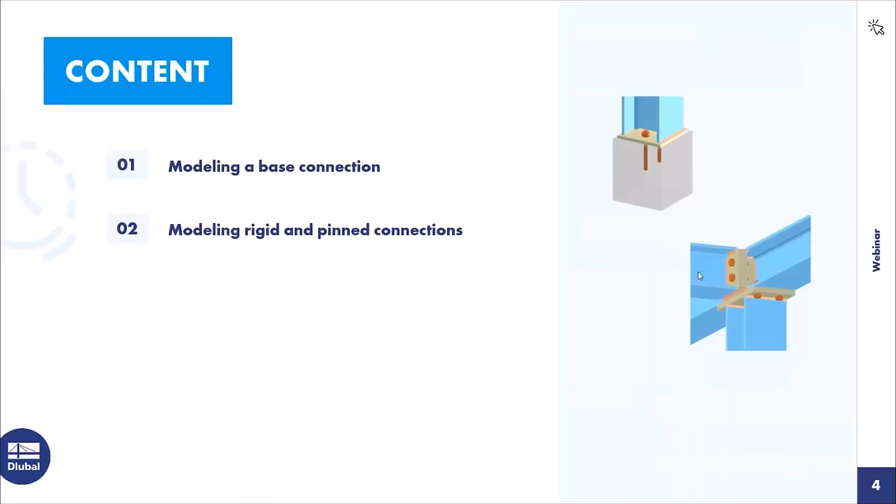For today's agenda, I will model different connections. I start with a base connection, then rigid and pinned connections. Then follows the connection design, and we do a stiffness analysis. The next point is result evaluation and documentation, and the final point is prospect.

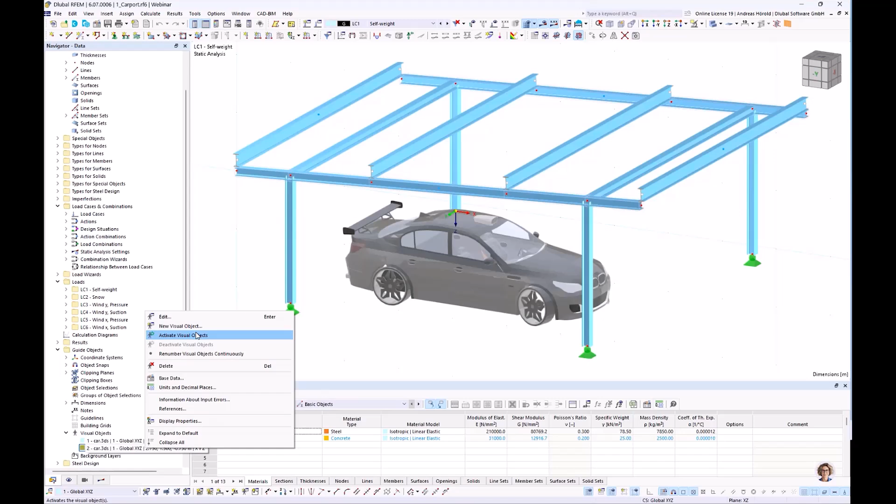Okay, that's the model for today: a larger carport with dimensions 6 meters by 7.5 meters. I display two guide objects - visual objects - and activate them: two cars so you can estimate the dimensions of the carport. That's the reason it's made of steel; it's a little bit larger than a normal carport.

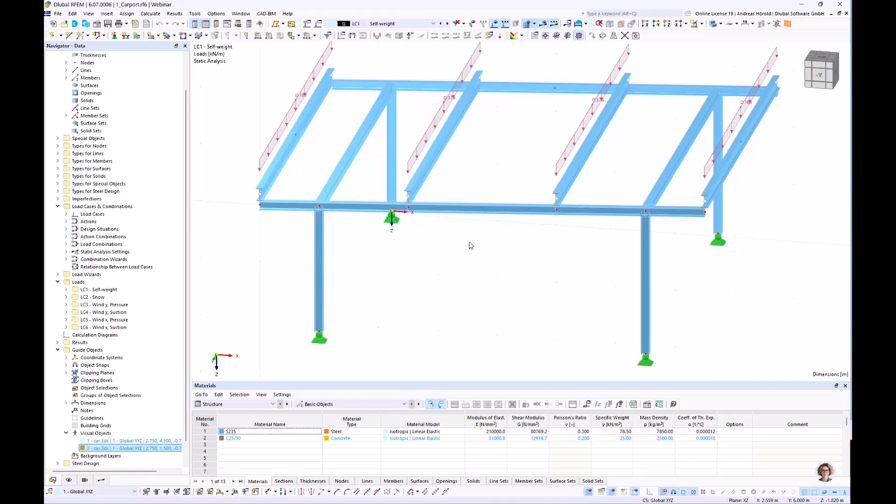Okay, I deactivate the guide objects. So we have different load cases: self-weight load case, snow, wind in all directions. Then there are different load combinations, for the ultimate limit state and for the serviceability limit state design. Also load combinations for the design of lifting up.

So then I did a steel design. Design ratios by members - all designs are fulfilled, with larger and higher design ratios in some members.

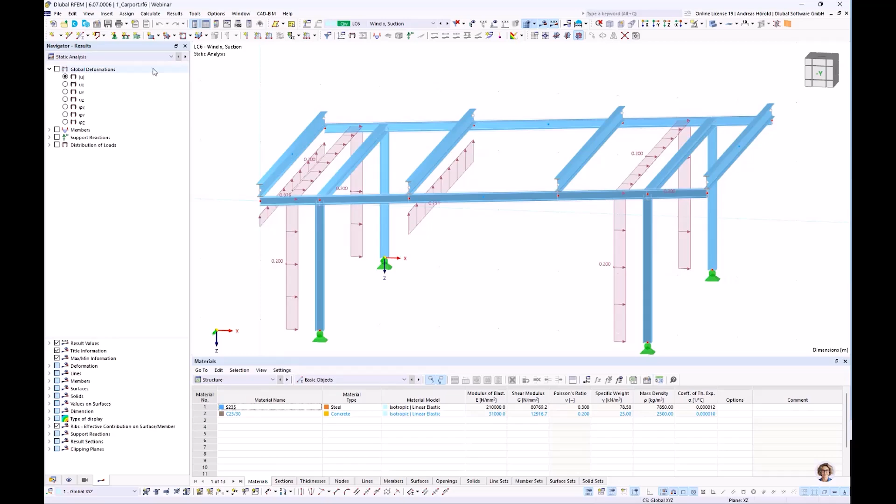Then we activate the steel joints add-on in the base data add-ons. Steel design is already activated, and we activate steel joints so we can design all the joints of the structure. For standards, we use the Eurocode and the German National Annex for all the load cases, classification, and combination wizards for the steel design, and also for steel joints.

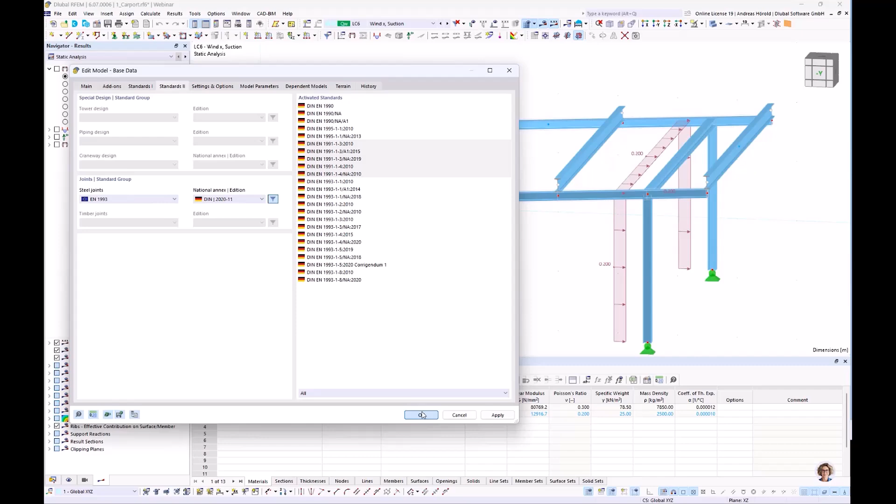So then we start with the first joint. I right click on that node and choose create steel joints. It's only one member, so the type is 'ended' - that's clear. Maybe we turn back to main. Let's check the ultimate configuration - that's default.

You can perform a buckling analysis - if you have larger plates, such as webs or so, you can perform a buckling analysis. That's quite important. The design check for the plates: the limit plastic strain is 5%, also for the welds. You can change that, but I'll leave it because that's the value from the Eurocode standard. I'll leave all the other settings as well.

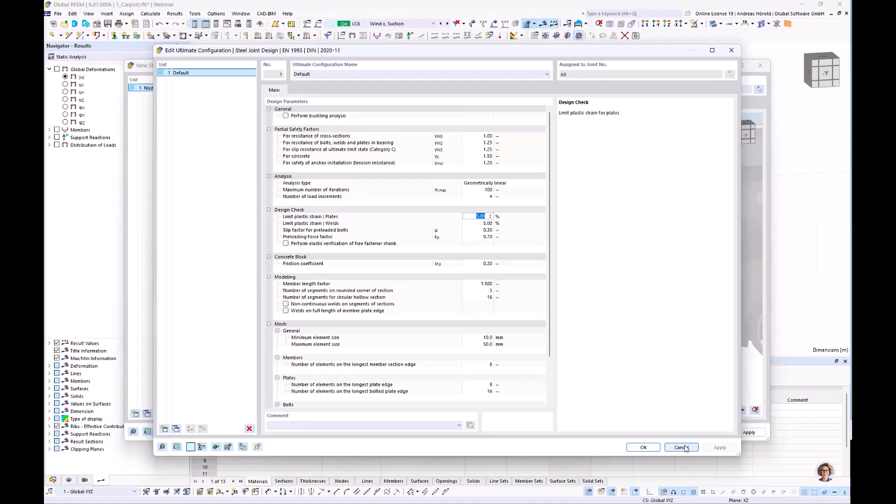Then we turn to components, and I can press insert component at beginning or at end - that doesn't matter. I select this component: base plate. Now we have different modifications, stiffening elements, connection elements, and others, including fasteners. You can move the mouse over the image and see as a tooltip what connection or stiffening element is available. So I select base plate.

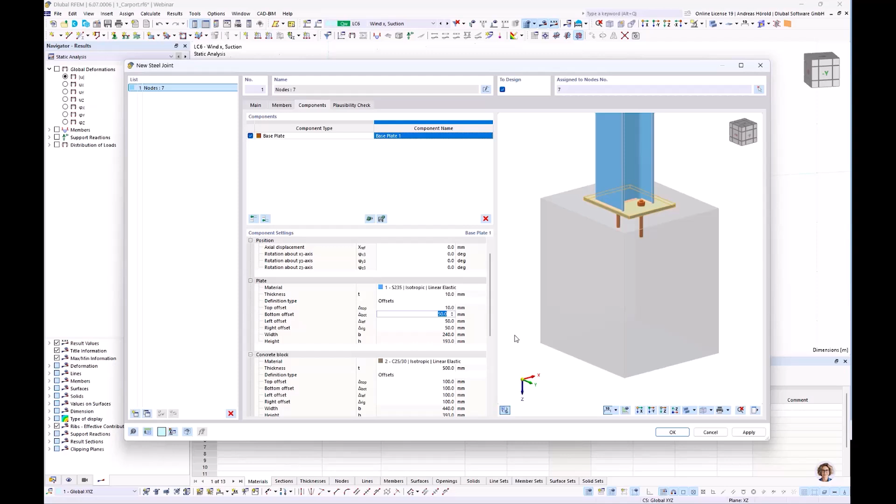That looks already quite good. That's a concrete block; we decrease it a little bit. Let me enter some values: the thickness of the plate should be 10 millimeters, top offset in all directions is 10 millimeters. To overtake the previous value, you can press F8 - F8, F8, F8 - then we have the value on all sides.

So then the thickness of the concrete block should be 200 millimeters, and I define the offset again - also a very small offset of 10 millimeters. I overtake it again with F8.

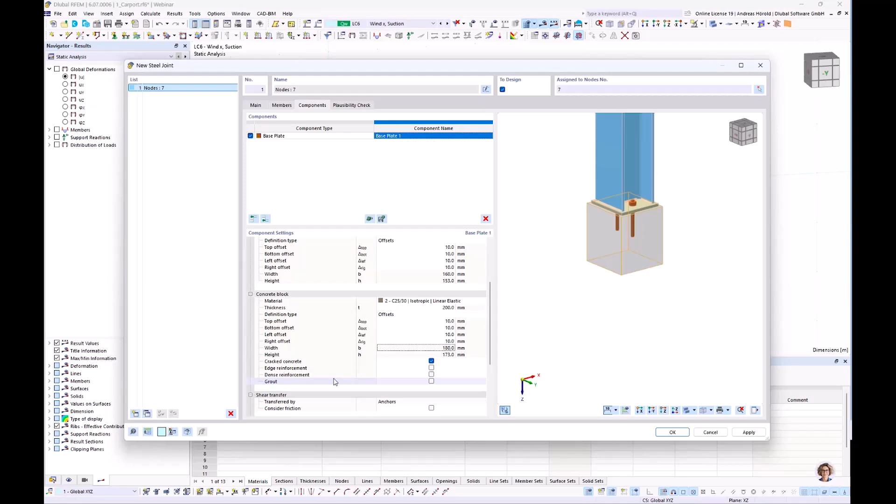So then you can consider cracked concrete - yes, we do that. You can also consider edge reinforcement, dense reinforcement, grout - you can display that grout, but no, we don't use a grout. Then you can consider the shear transfer by anchors, and you can also consider friction if you want.

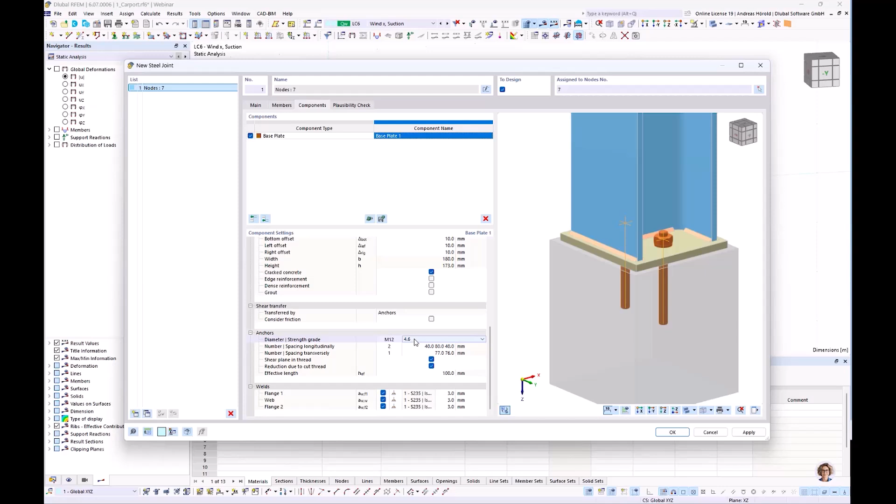So then we turn to the anchors. M12 is okay in our case, and we choose 4.6 for the strength grade. So these dimensions are okay, these distances. Then we change that value so it's exactly in the middle. The shear plane shouldn't be in the thread, and we consider the reduction due to cut thread.

So the height or length of the anchors should be 100 millimeters - that's okay, and the welds are also okay. Yeah, that was very quick - that's all for this joint. We do the plausibility check - that's okay. We take a look at the model, and now you can see the joint, the column base joint, here.

You can disable it when there's no joint model, or you can display the simplified joint model right above here. But we would like to display the detailed joint model.

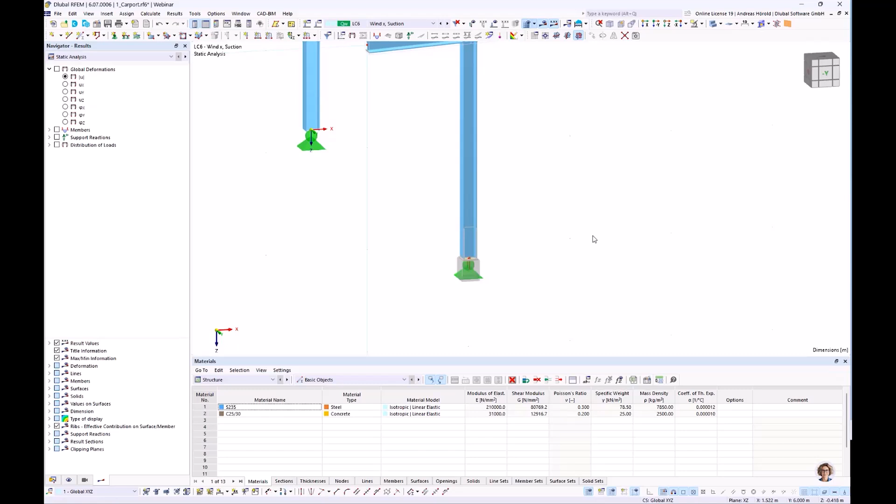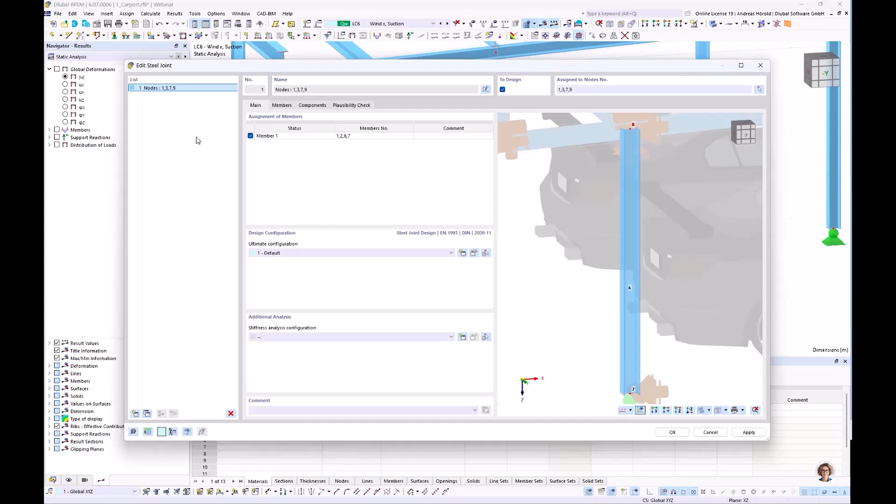So I double click on the steel joint again, and I assign also the other nodes right above: this one, this one, and this one. Okay, now all 4 nodes are selected.

So the next joint is the frame corner. We can see in the model, the steel model is stiffened in all directions by frame corners, in this direction and also in this direction. There are no bracings.

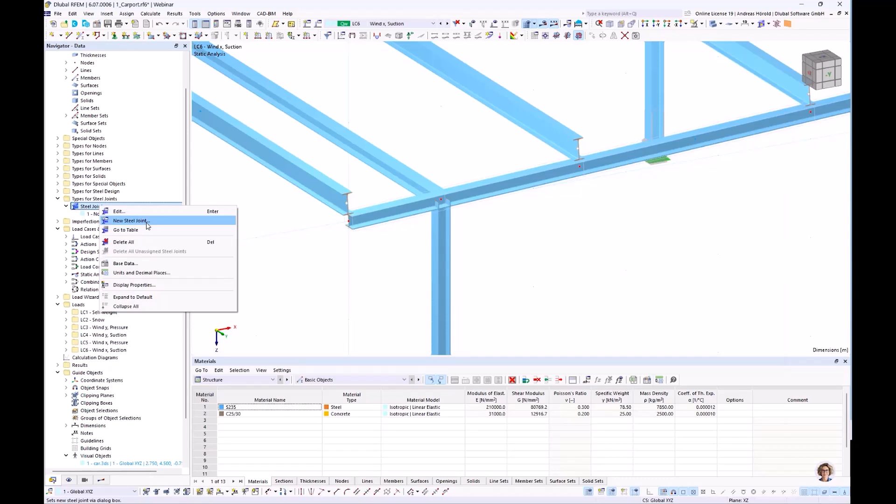And we would like to define the connections on the frame corner, so let me show you another way to do that. You can see in the navigator data the types for steel joints. One steel joint is already there, and I can do a right click and press new steel joint. But now I have to assign the node.

So for members, those 4 members are connected at that node, and we would like to do a stiffness analysis for the frame corner. That's why I select initial stiffness, no interaction.

Let me go to the settings. Initial stiffness is selected. For the future, there will be another stiffness analysis type available, the stiffness diagram. That's for larger connections with high loadings, where you can consider the plastic behavior.

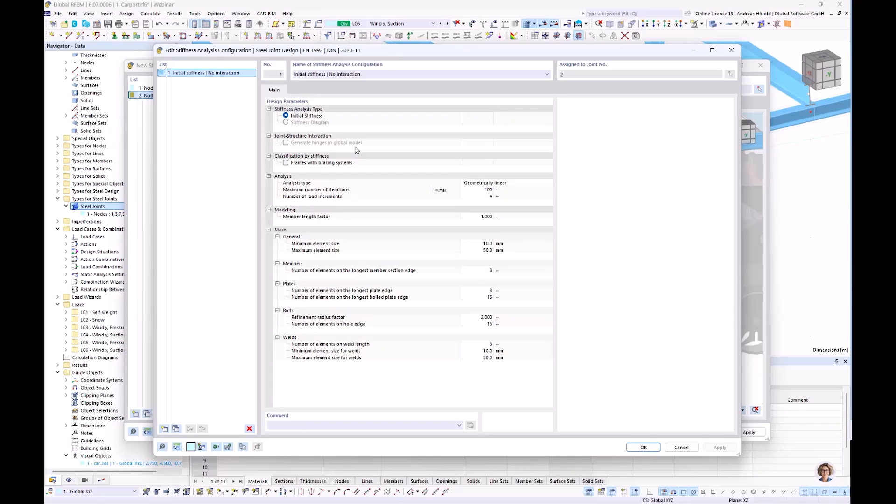Then in the future you can select generate hinges in the global model. That's not yet available, that's why we do that by hand later. Okay, that's all.

So we turn to members. At least one member should be supported. That's ended. This one is continuous, and automatically member 3 is also set to continuous. So for the column, we would like to do a stiffness analysis.

The program should calculate the stiffness of the joint around Y and around Z, meaning M-Y and M-Z. And for this horizontal beam, there should also be a stiffness analysis for M-Y.

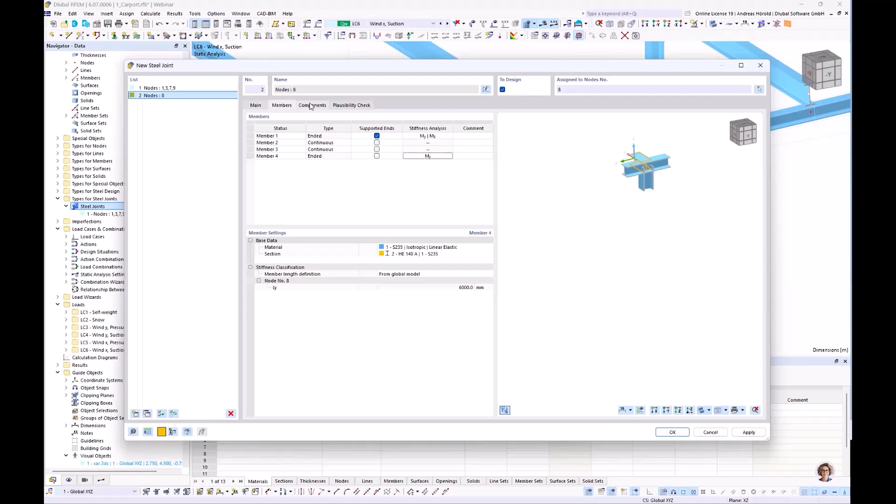So then we turn to components. We insert a component, and this time an end plate. You can move over it, with the end plate in the middle. So the connected member 1 should be the column.

You can see it's selected in the right window with the yellow selection. And the reference member should be member 2 and member 3. Okay, so you can already see a connection forming.

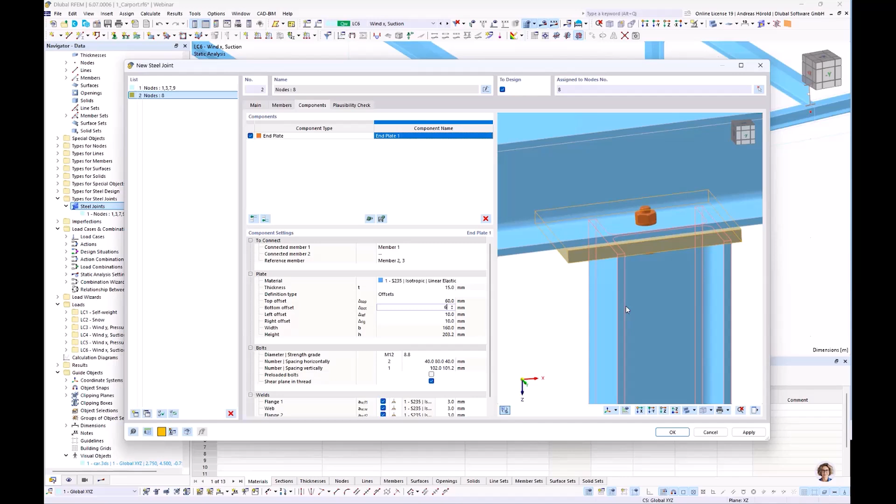Now we have to modify it with the next steps. So the thickness of the plate should be 15 millimeters, the offset in this direction should be 60 millimeters, also in the other direction, and in this direction there should be no offset.

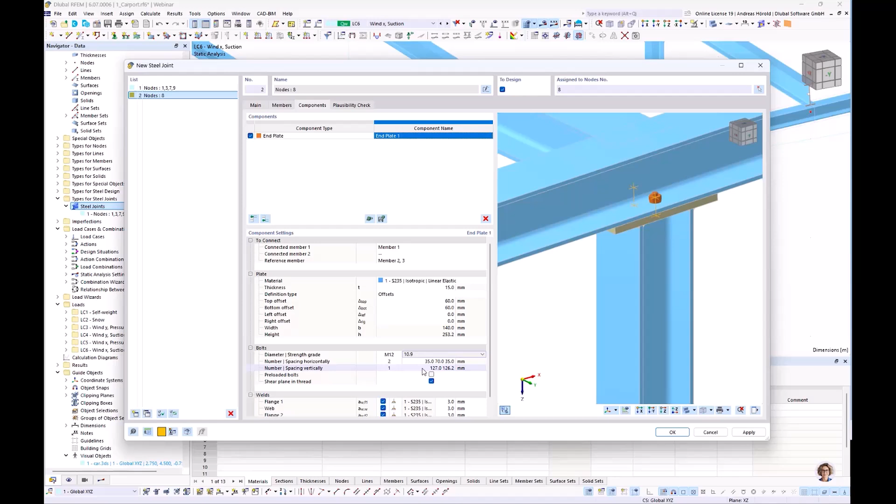Now you can see the changes in the window any time. So M12 is okay, but we choose 10.9 as strength grade. That's okay, all those distances, but we also select for the spacing vertically 2.

And I select these values, and that looks quite good. We use preloaded bolts for this connection, and the shear plane shouldn't be in thread. And I change the welds for the flanges to 4.

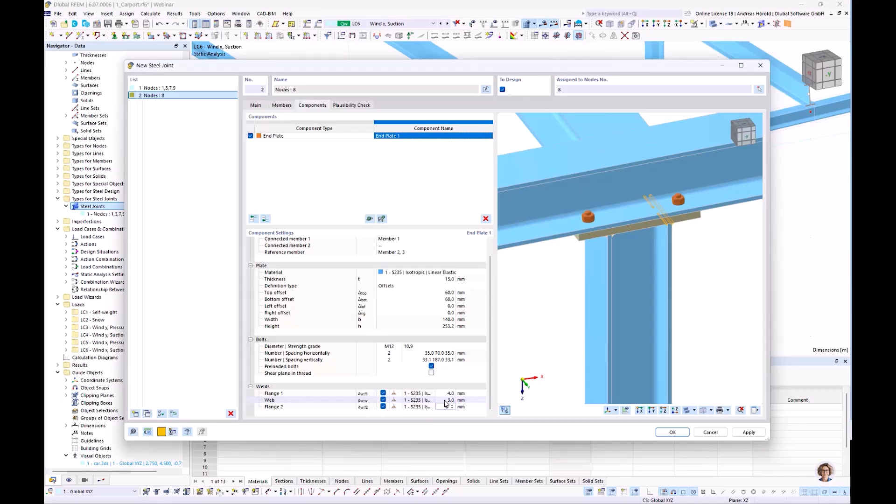Okay, now you can see any time what parameter should be defined. So that's all for the connection of the column to the horizontal beam.

And now we would like to connect this horizontal beam with this horizontal beam. That's why we insert a component from the library. So I select that, and what's quite new, the library is in the Dlubal Center.

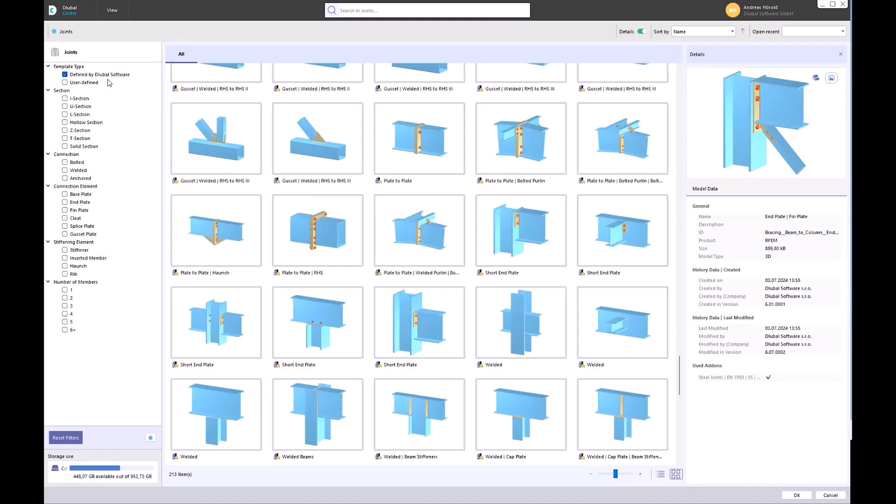Now you can see different template types, also user-defined ones from me. So I select only the defined connections or joints by Dlubal Software. We've got the I section, the connection is bolted, and there are 3 members in the connection.

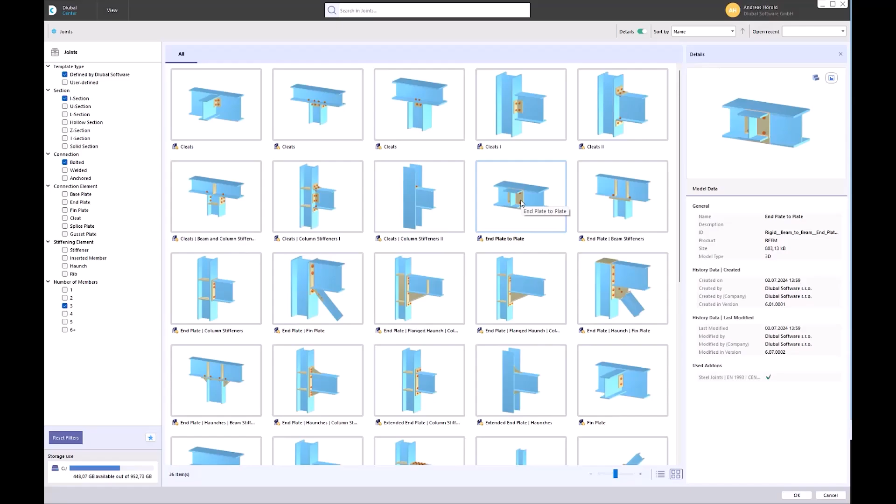So we would like to select end plate to plate. That looks quite good, so I double click on it, and we should see a preview in some seconds.

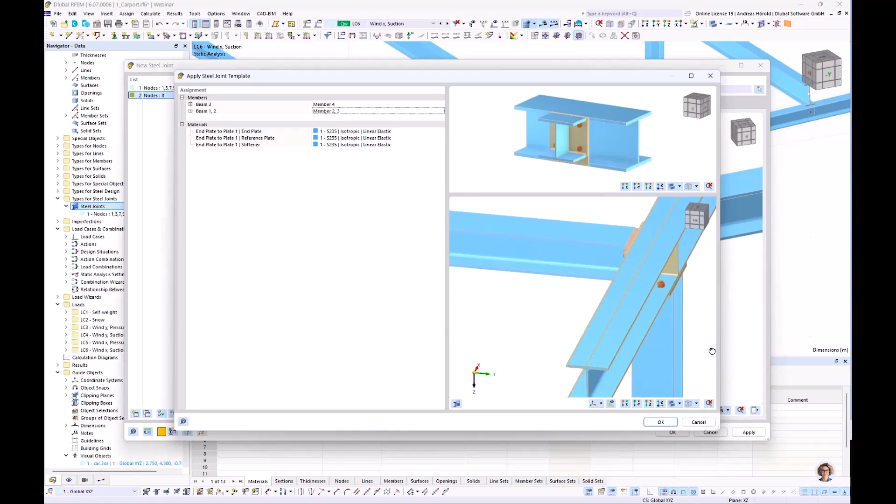But at first we have to select the member that should be connected, member number 4, this horizontal beam, to member 2 or to members 2 and 3. The preview looks quite good, and we can accept it with OK.

So let me change the values, also a thickness of 15 millimeters. No, we have to select that line first. Thickness of 15 millimeters, okay.

Minus 7.5 is okay, that we can consider a weld here. Okay, all the values for the end plate 1 is okay, but we have to modify the reference plate, 15 millimeters. The top offset and bottom offset is okay.

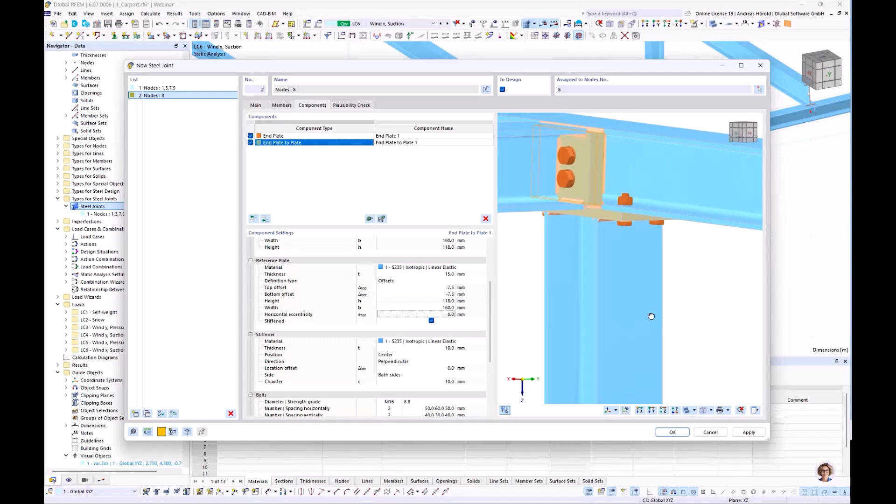But I decrease the width so that we have the same dimension as the end plate, so it should be stiffened. Okay, but not on this side, because we would like to define two stiffeners here in the back, but we can't do that because the connection would be closed. So center is okay, but not both sides, only one side.

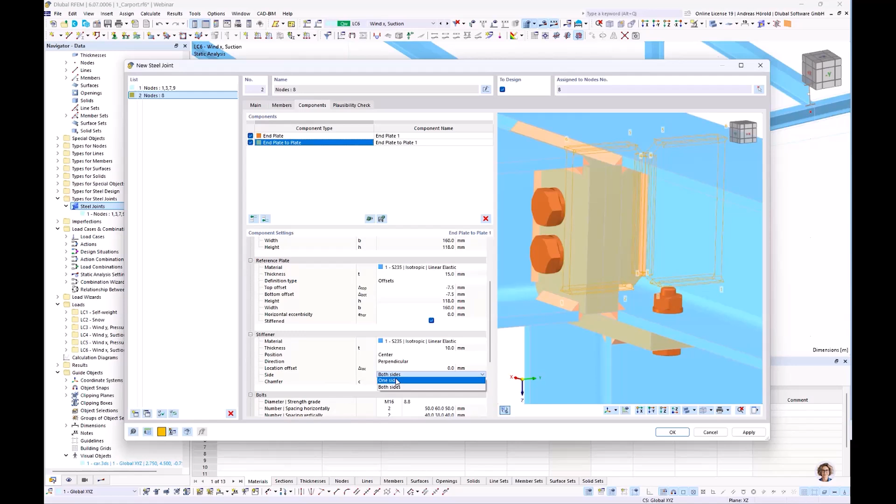So now this stiffener has disappeared. Okay, then the diameter should be M12, 10.9 as strength grade.

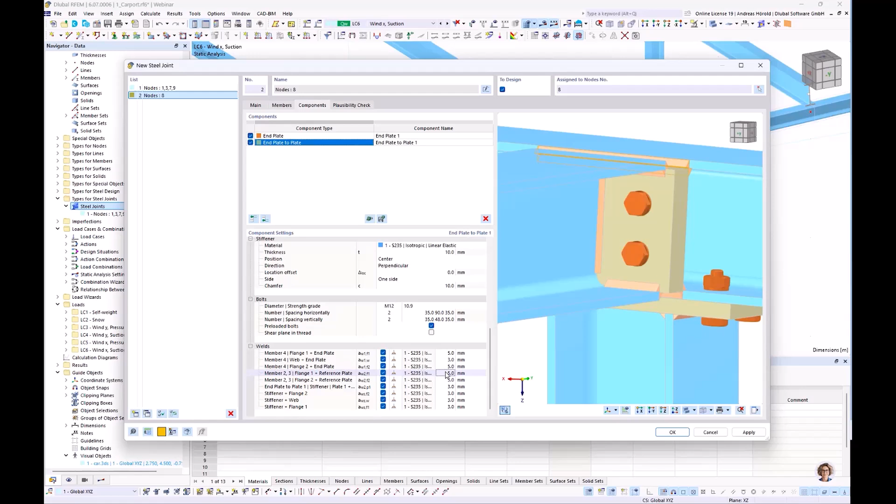So let me change the spacings: 35, 35, and then also here 35. Okay, so preloaded bolts, and the shear plane shouldn't be in thread. The welds are okay, 5 mm for the flanges and 3 mm for the webs.

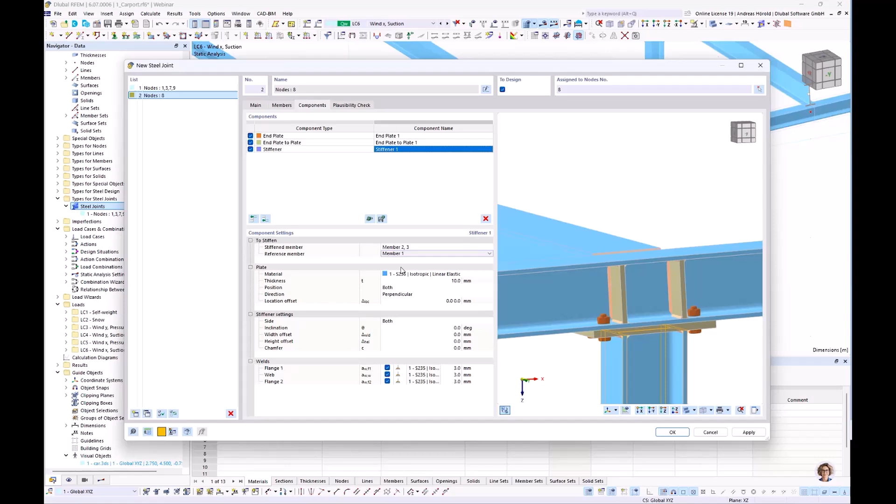Okay, so then we have to add the stiffeners here. I insert a component at the end, you can see the stiffener here. The stiffened member should be this one, the horizontal beam, and the reference member should be the column. So then the position is okay.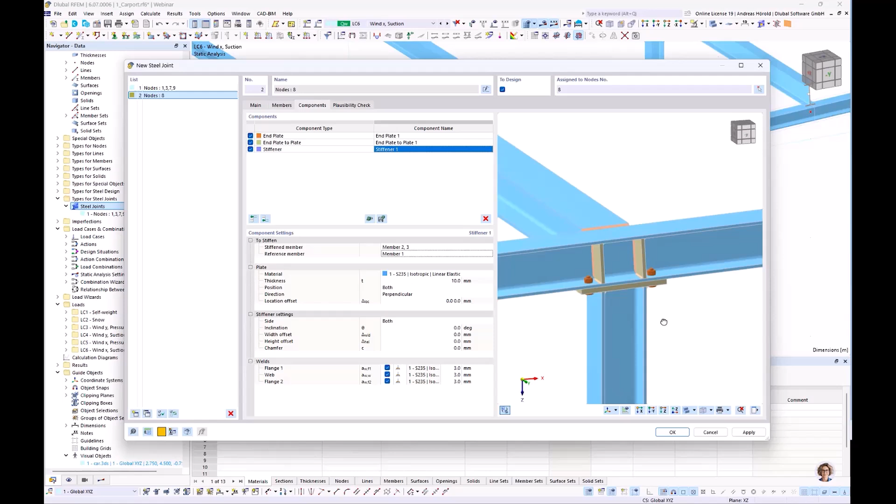You can say perpendicular or parallel. Sorry, that was a wrong click. So that looks quite good.

But it shouldn't be on both sides. You can see that would be closed here. That's why we select the right side, then we have only the stiffeners on this side.

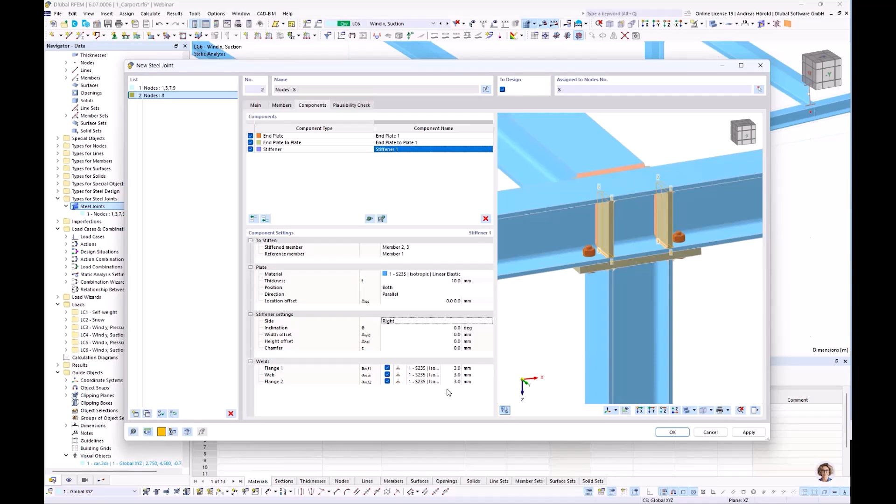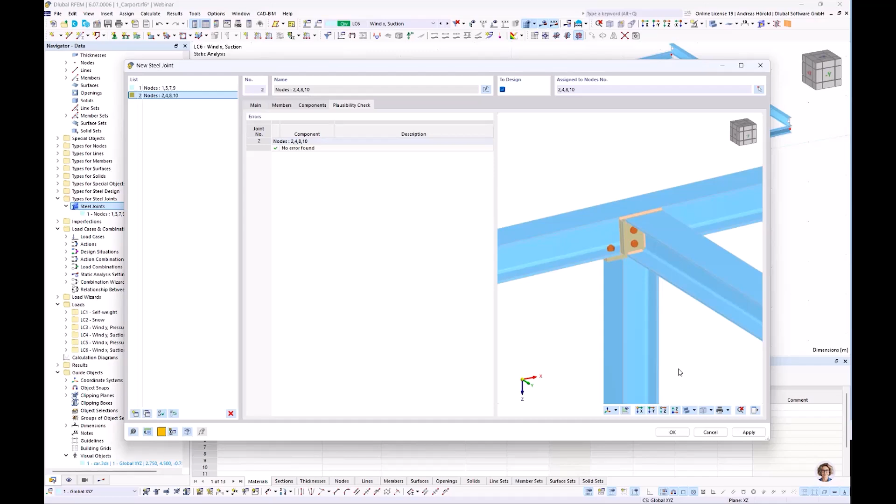So the welds for the stiffeners are okay, 3 mm. Plausibility check is okay. I can select also the other frame corners. Plausibility check is okay, and we can display all in the model. Okay, that looks quite good.

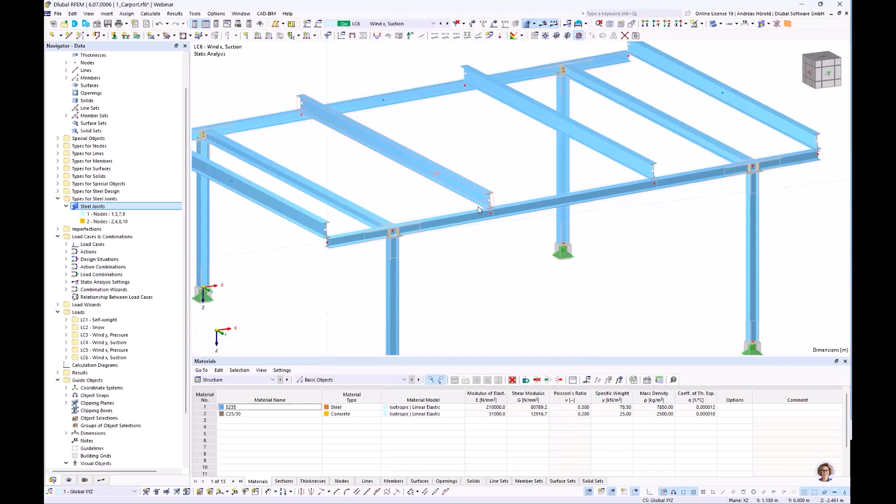Then we add joints for the purlins. I do a right click, create steel joint. So then members are, those are the 3 members.

This one is supported and also continuous, and member 3 is also continuous. So then component.

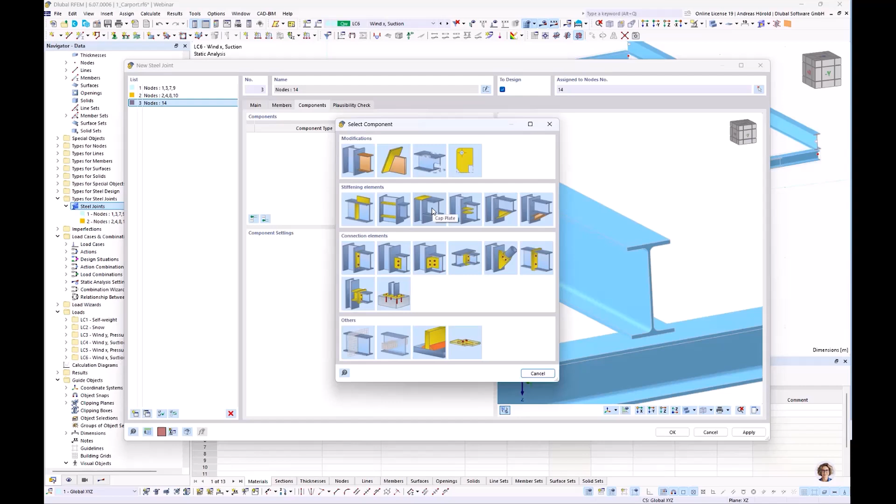At first we enter a cap plate at the end, not that we create a gable support. So yeah, beginning or end, that doesn't matter. And you can see the cap plate and the second line in the middle. So stiffened member is member 2, that's okay.

10 millimeters is also okay, but I define a top and bottom offset of -5 millimeters, so that we can weld that here.

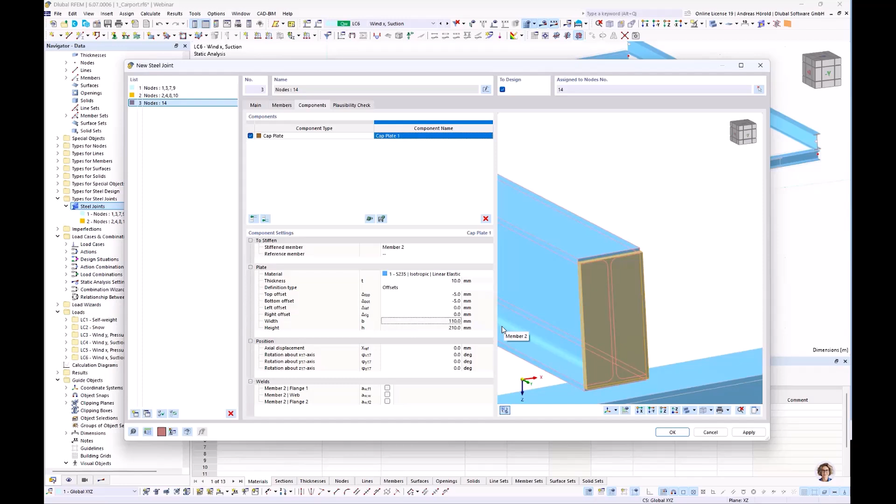So that's now in the middle, and we can select or define an axial displacement that we move it to the end. So that looks much better.

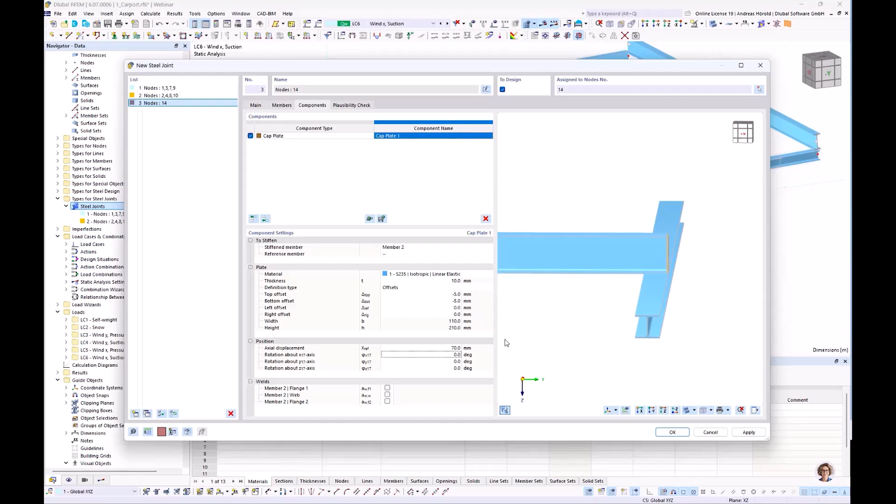So then welds for the flanges and for the web, 3 millimeters. That's okay.

So now we have to add fasteners. We insert component at the end. And you can see in the line below others, there are the fasteners.

So component 1 is a plate, a member plate. A plate is, for example, that cap plate or an end plate, and a member plate is a plate of the member, the flange or the web. So that's why we select member plate.

I zoom in a little bit. So then at first we select member 2, flange 2. You can see in the preview what is selected. Member 2, flange 1.

Should be connected with member plate and the upper flange. Okay.

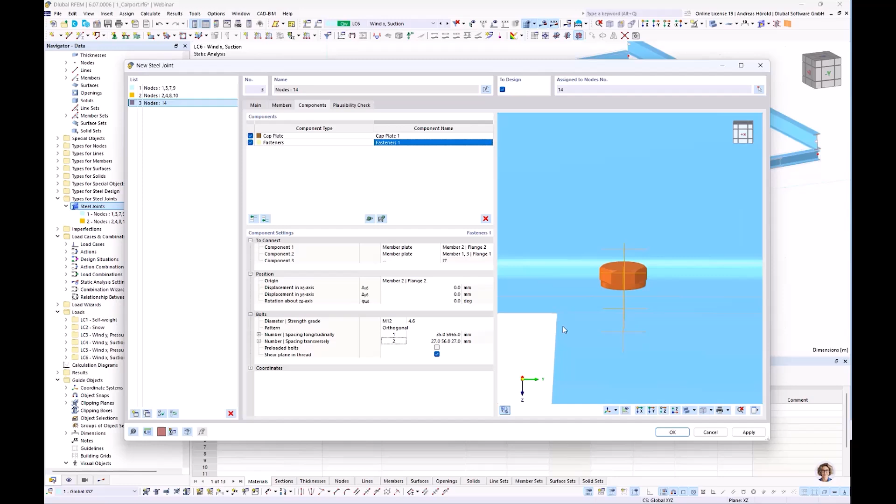And now it's in the middle of the member. I enter 35 millimeters, and you can see now the bolts are okay. I changed that value to 25 millimeters.

Okay, no preloaded bolts, and the shear plane shouldn't be in thread. Okay, that's all for this connection.

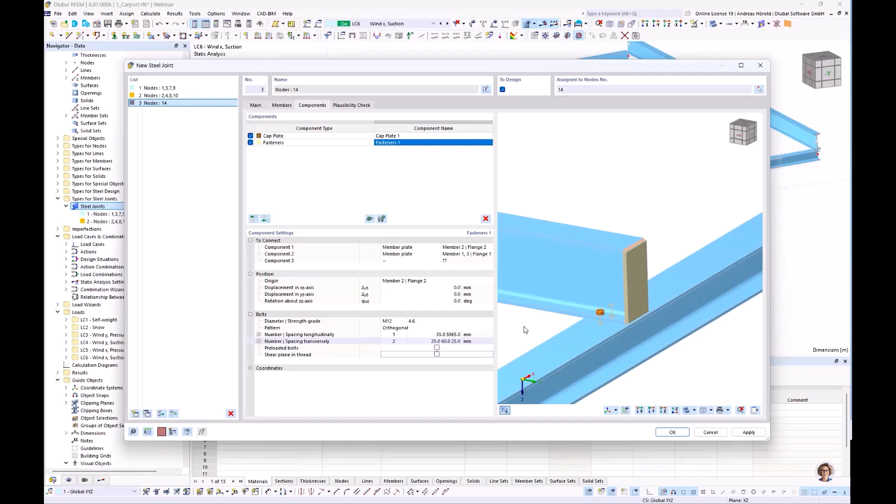Plausibility check is okay. We select the other inner purlins. The connection doesn't fit for the purlins at the edge because of the bolts here. So plausibility check is okay.

So and we can take a look at all the connections. That looks good.

So now I turn back with double click in this dialog, and now I copy that connection for the outer purlins. So at the bottom on the left side, copy selected joints.

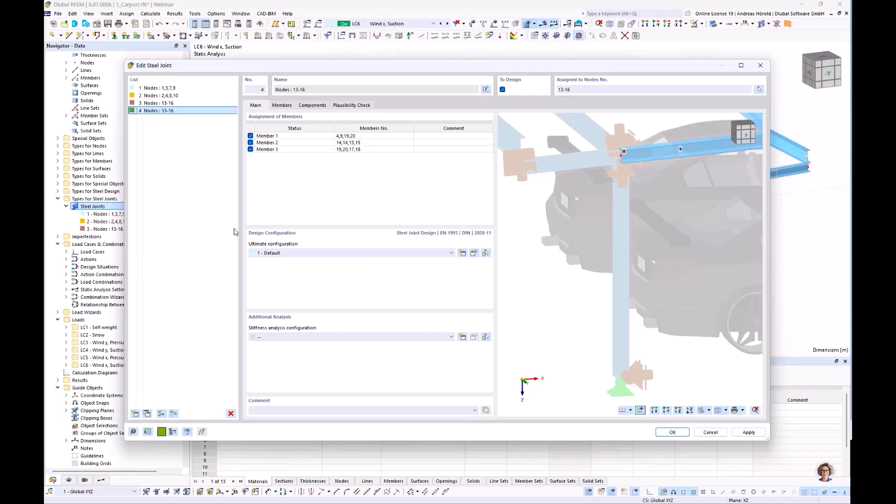So at first I have to select the other nodes, 4 nodes. Okay.

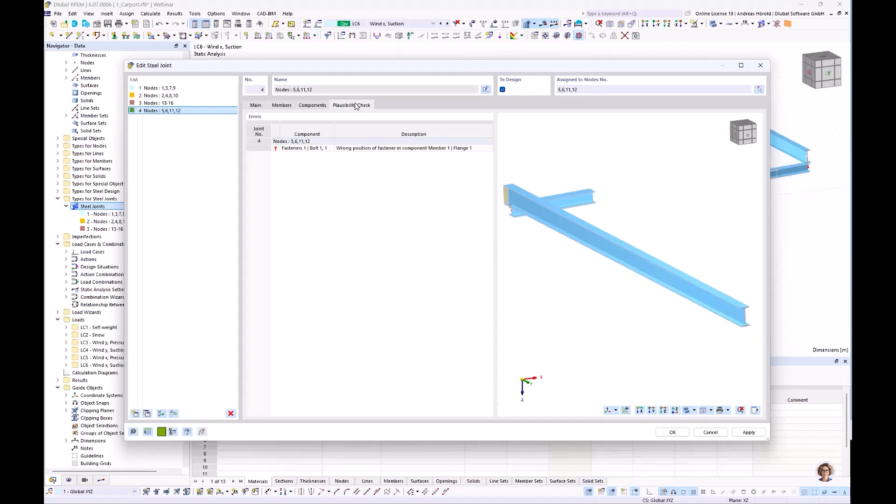And there should be an error message, wrong position of the fastener. That's what I mean.

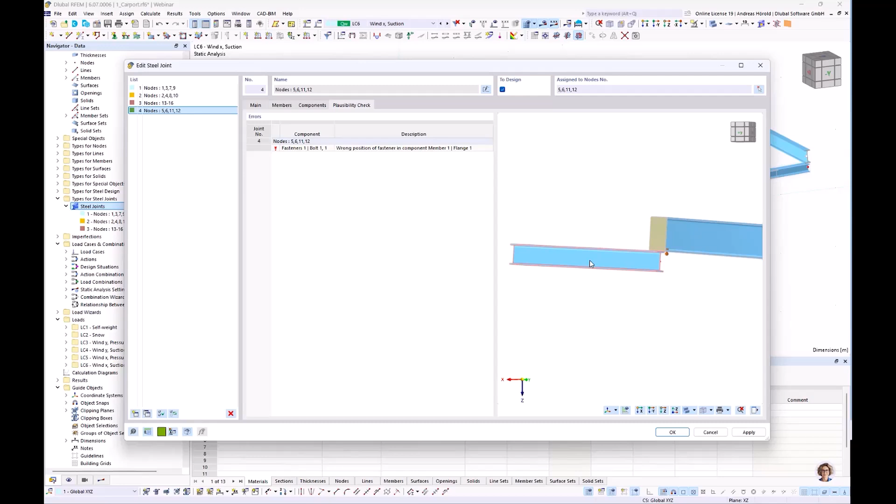Okay, we have to enlarge the horizontal member. So how to do that?

We insert a member cut at the end. Left above, member cut. It's also, you can cut a member or you can increase the length of a member.

Member to cut is member number 1 by member number 2. So, not the closer end, but the farther end. You can see now the length is okay.

So now should also the plausibility check be okay. Yeah, that's all.

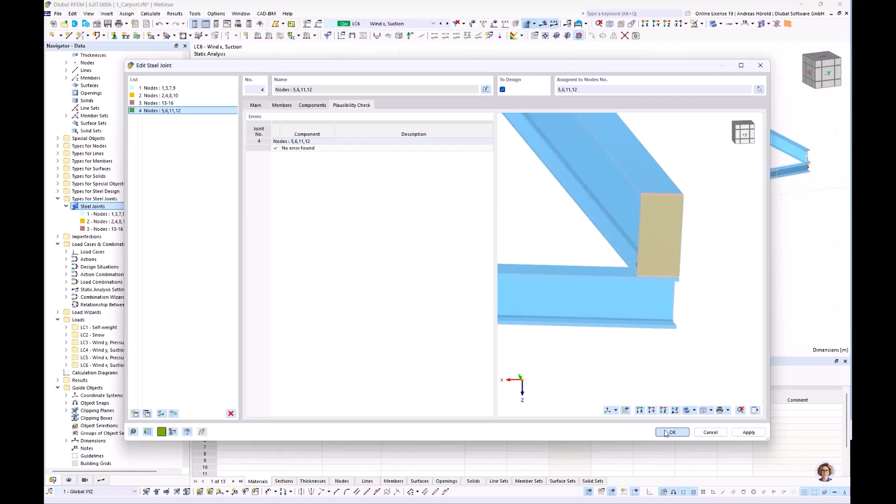Okay, now all connections of the model are created. Let me go to the load case imperfections in the navigator data, right click, load cases and combinations.

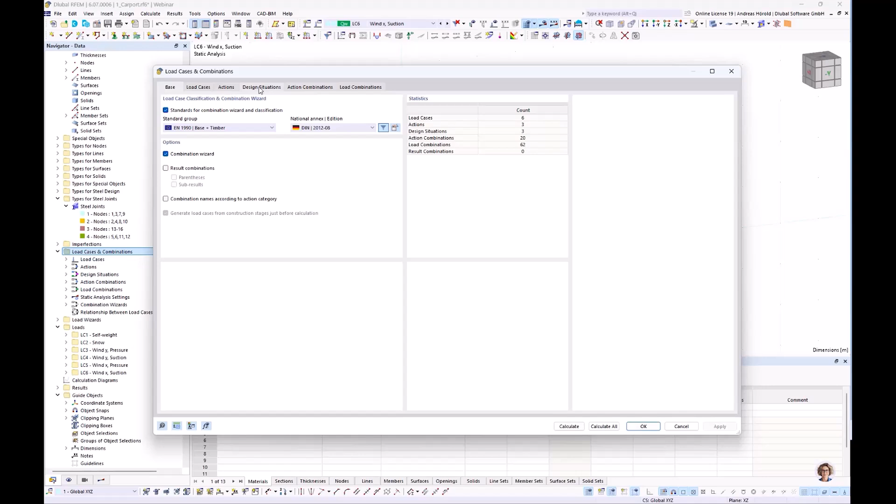And let's move to the design situations. Ultimate limit state design, the steel design and the steel joints design is activated, that's okay. Serviceability limit state design, only steel design is selected, that's also okay.

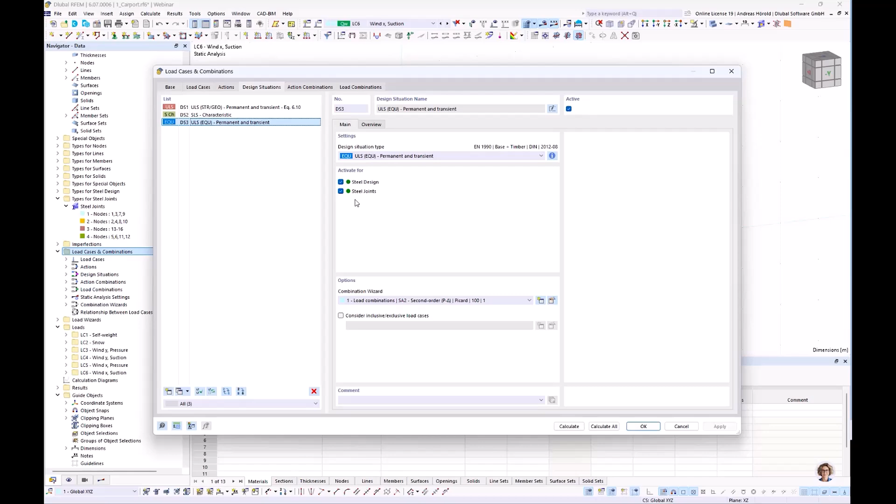And for this design situation, EQU, both designs are also activated. So to skip the calculation time, I turn to an already calculated model.

So in the table below, we can take a look at the steel joint design. I turn to the table design ratios by joint, and you can see on the right side the design check types.

I overtook the model from the German webinar. There are some German words, but that doesn't matter. Take a look, please, at the design checks: the anchor check, the concrete check for the column-based connection, the plate check of the frame corner, the ultimate limit state for the pre-loaded bolts, the fillet weld check.

I double click on that line to go to the details of the check. When it's opened the first time, it takes some time, not in the second step. So you can see the design check for the welds, and you can also print that in the printout report. We will do that later.

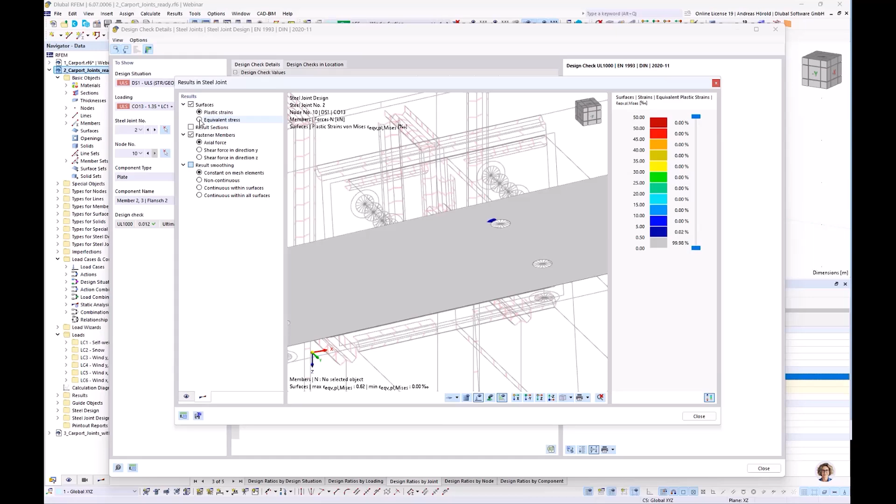But we have, of course, I can show that we have also elastic stresses. I check here equivalent stress, and you can see also the elastic stress, and also only in this area where there is a small plastic stress, and that means also a plastic strain.

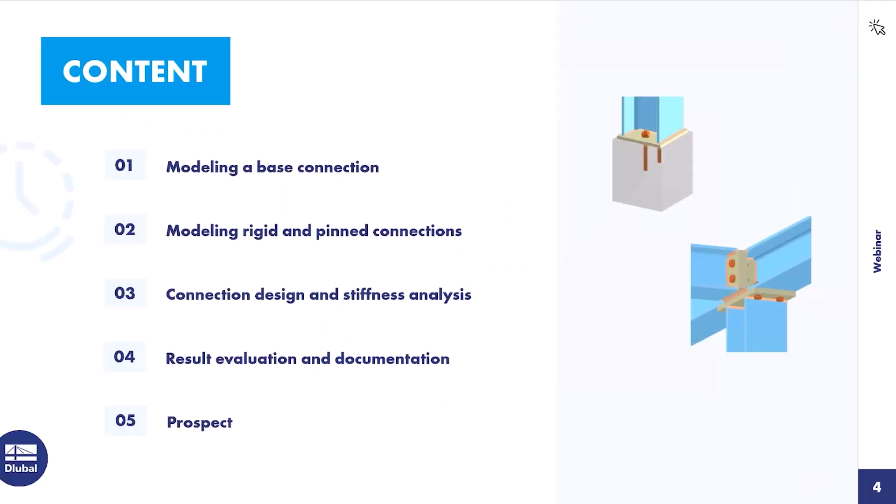That means you can't increase the load with a factor of 5 or so. That's not possible, because that's the area of the plastic strain, and we have already got a plastic stress and plastic strain in the model. And if we increase the load a little bit more, then it would be quick - we would get quickly a higher design ratio. Okay, I turn back to the model.

So let's take a look at the stiffness analysis. Those are the rotational stiffness values for the frame corner. Those are the values from member 1 for the column, and those are the values for this horizontal beam. And we have to overtake those values by hand.

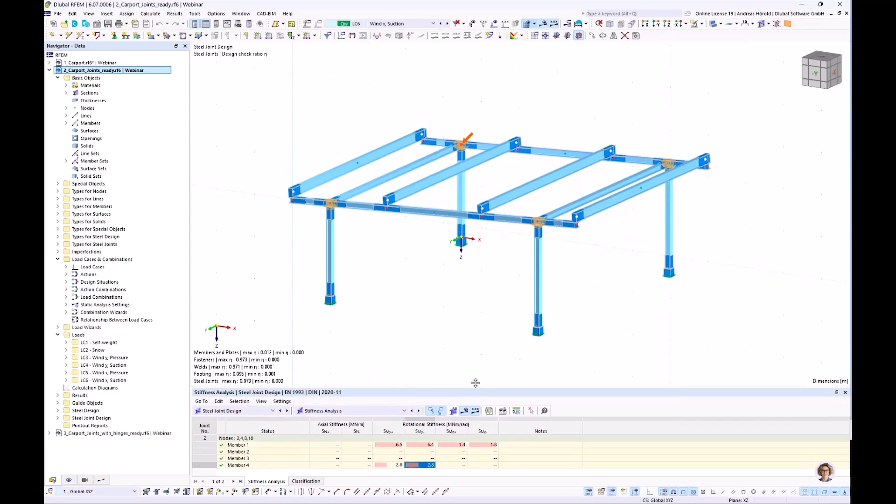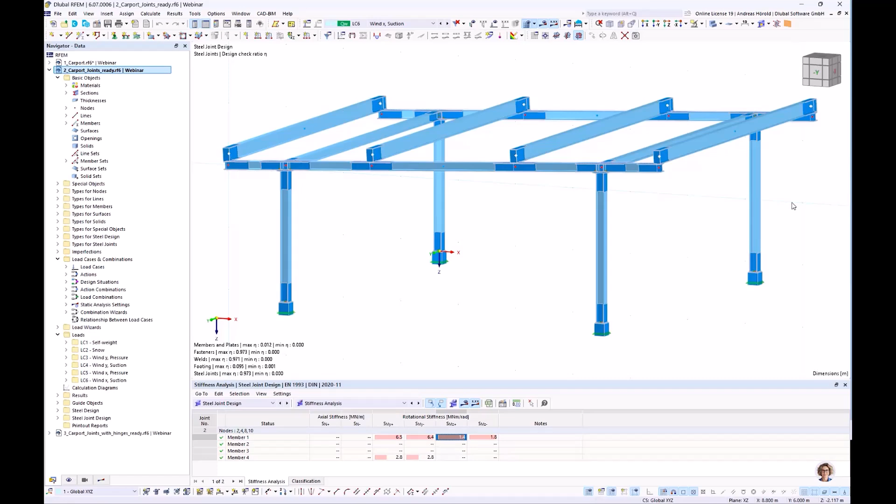So we start with the columns, the column ends. We overtake these two values, so we take the smaller value here. So I double click on the member, I select hinges, and we turn to the dialog hinges, and we need to consider member hinges at the end.

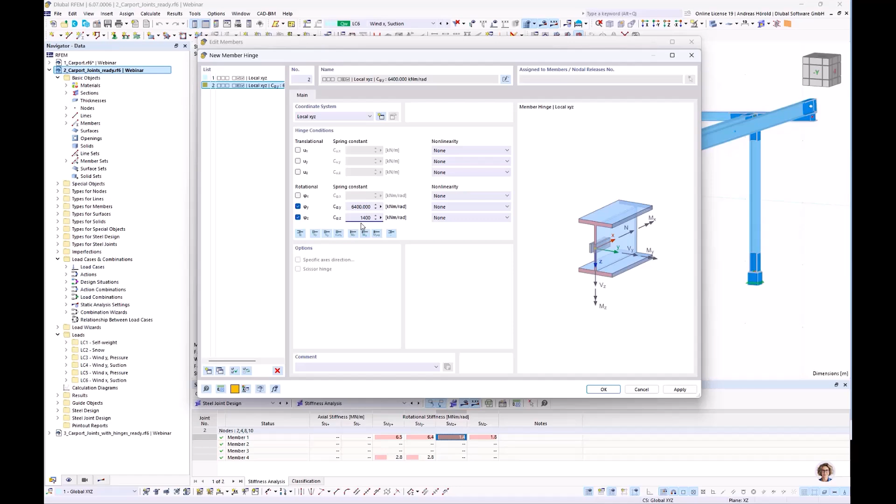So the rotational spring constant should be... let me move the dialog a little bit higher. You can see the rotational stiffness is displayed here in mega Newton meter per rad, and I have to enter it here in kilonewton meter per rad. So that's why I have to multiply it by 1000: 6400, and in this direction 1400. Yeah, this value is here and this value is here. Okay, so at all member ends.

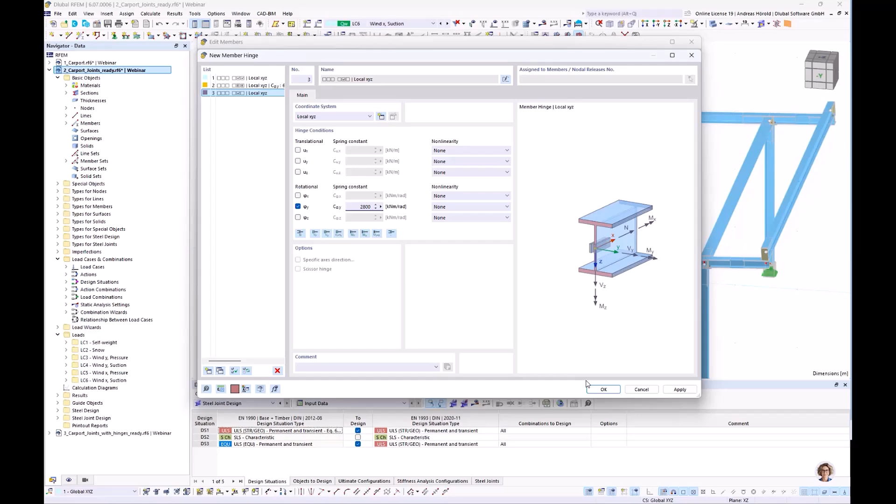So now you can see the hinges here. So the same for the horizontal beams. Double click, hinges, I turn to hinges and enter hinges for MY: 2800. Okay, the member start and the member end.

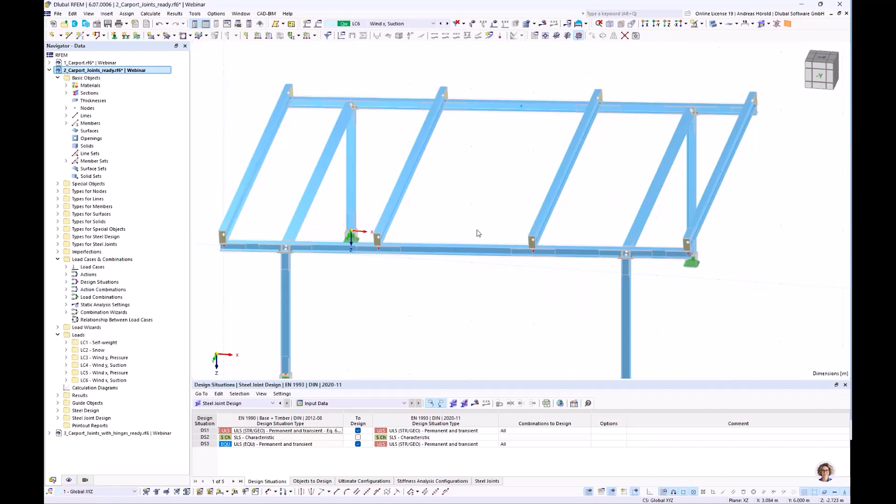So all member hinges are created, and then we can calculate the model again. I skipped the calculation time and turn to an already calculated model. Let me check the steel joint design. So all design ratios are under 1, that's okay. I turn to the steel design ratio by members.

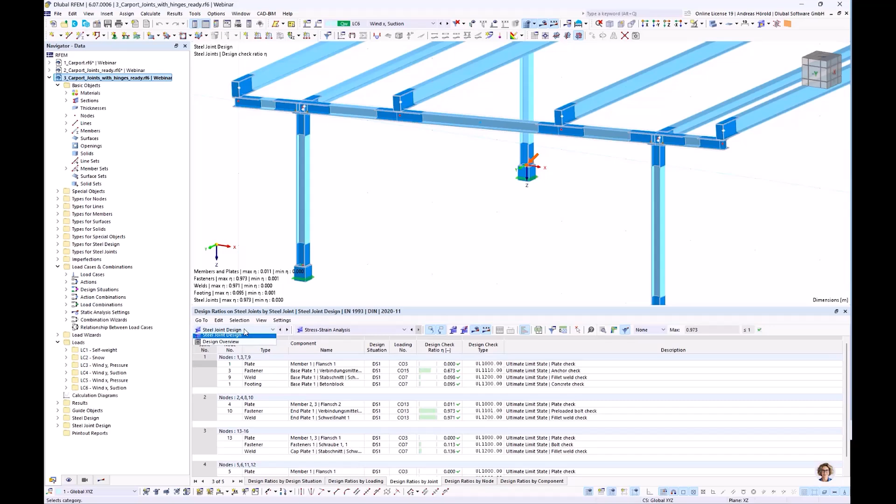And you can see the maximum design check is for the serviceability at that point, and that was quite lower in the original model. Let me compare that in the PowerPoint. The design ratios for the ultimate limit state design are nearly the same as in the original model, with differences of maybe 1 or 2%. But for the serviceability limit state design there are larger differences. You can see that in the PowerPoint.

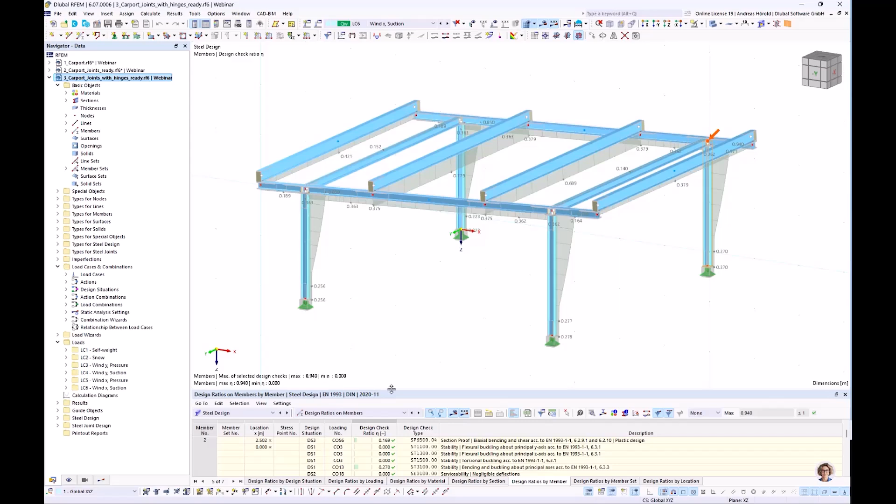Okay, I turn back to the model and we turn to the next point for today, the documentation. I would like to print detailed results, for example of one connection, steel joint design, using the preloaded bolt check. Let me open the design details, and I would like to print the equations from the standard and the design in the printout report.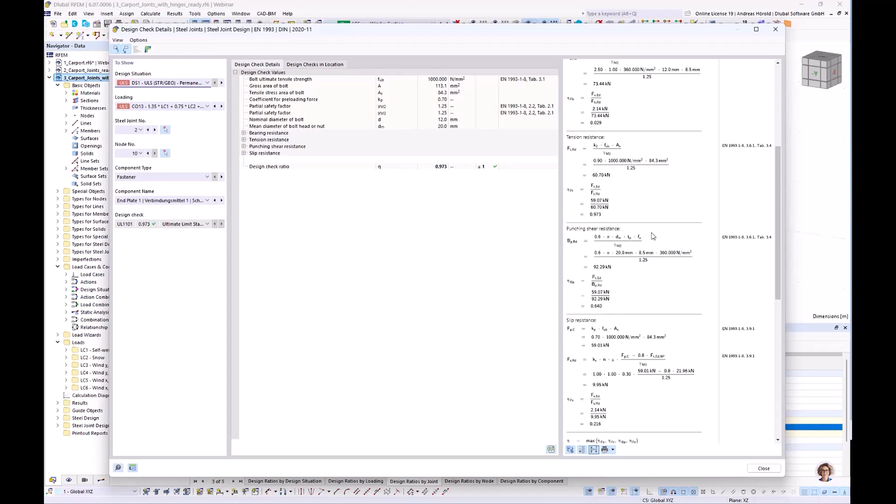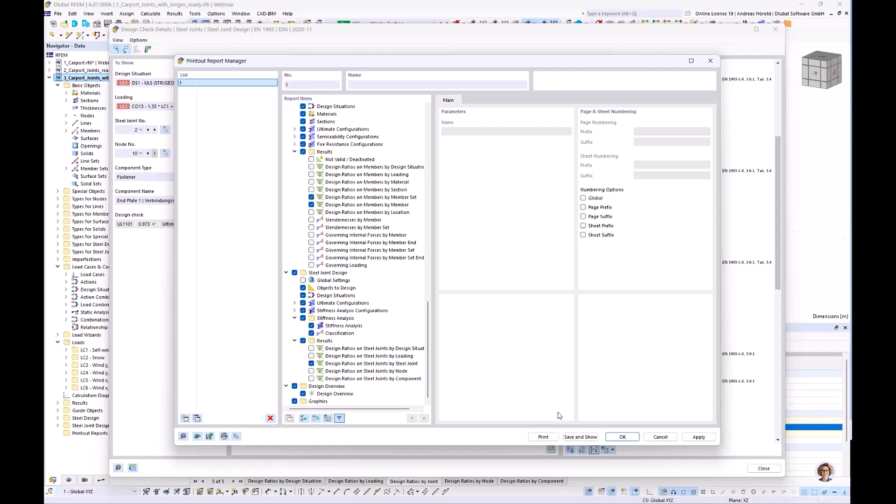So those equations should be displayed in the printout report. That's why I print graphics, or I print it to the printout report. So this is the printout report. I leave the settings, I uncheck the steel design for our webinar. We print the steel joint design ratios on steel joint by steel joint. That's quite okay, I press save and show. So the printout report is creating.

General settings are, for example, for the cover, I can do a right click, edit. I can enter the client here, John Doe. You can check the preview image or display the preview image. Okay, I have increased that value for the printer.

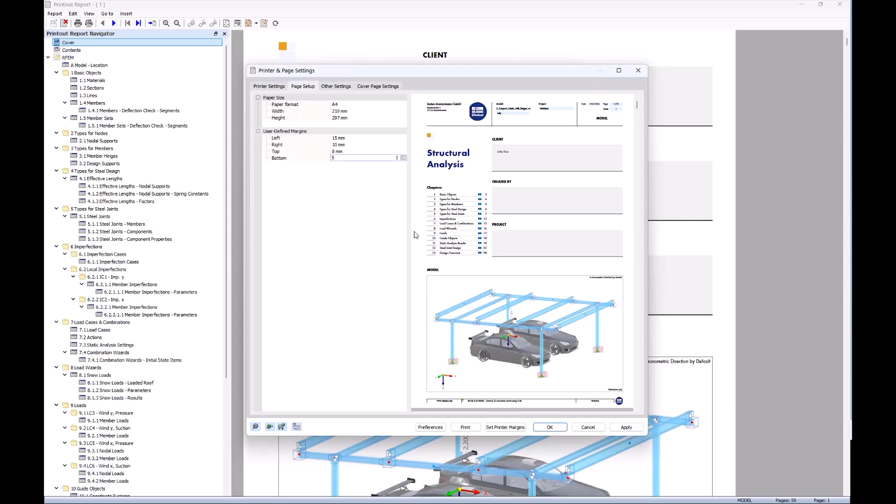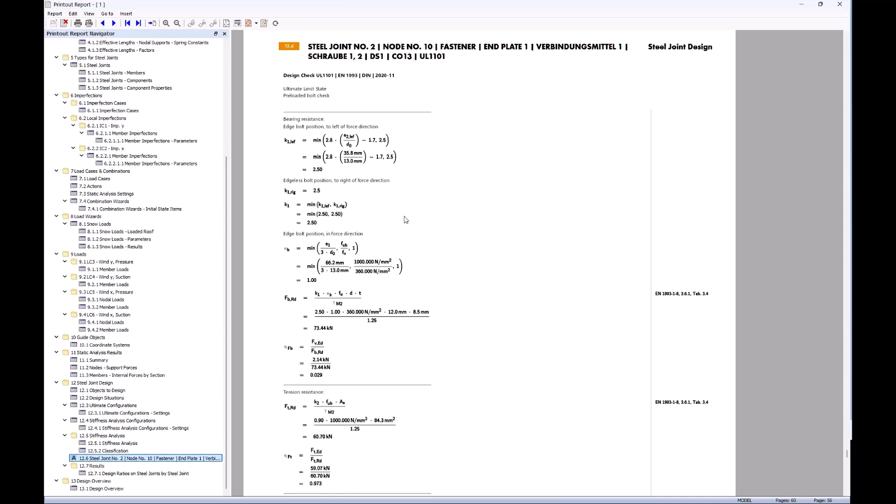So, okay, then let me find the equation or the detail check that was printed here. I can also move that at the end of the printout report. And I would like to print another graphic as an example. So let me move that to the other screen.

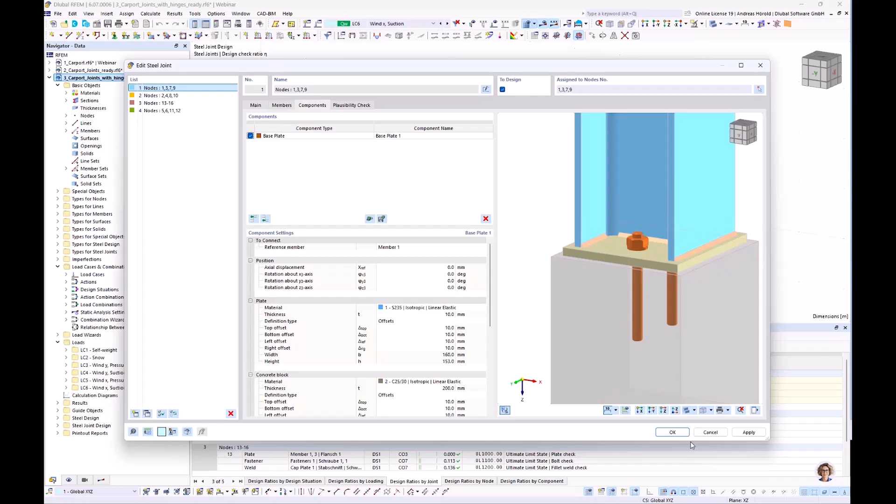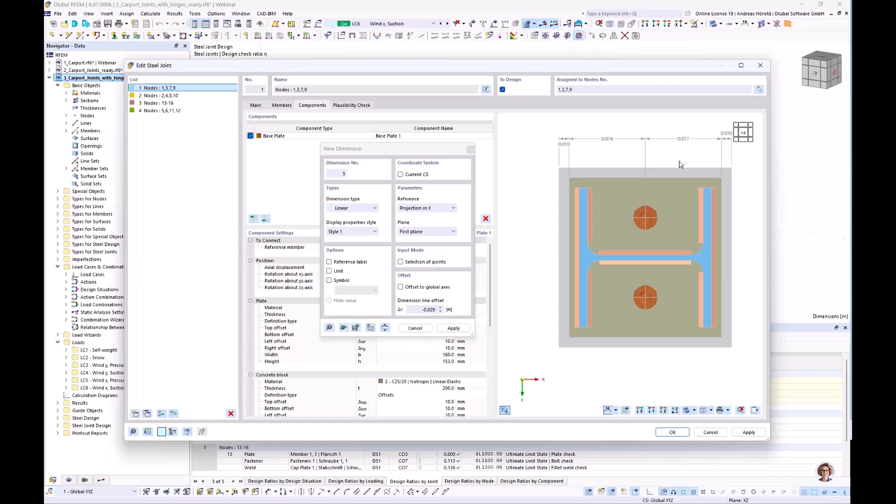I leave that dialog and double click on the column base joint components. I select the view in +Z direction, and with a right click I can add a new dimension. For different dimensions I select linear, so in X direction. I select the corners of the plate, the concrete block and the bolt. Then in vertical direction the same.

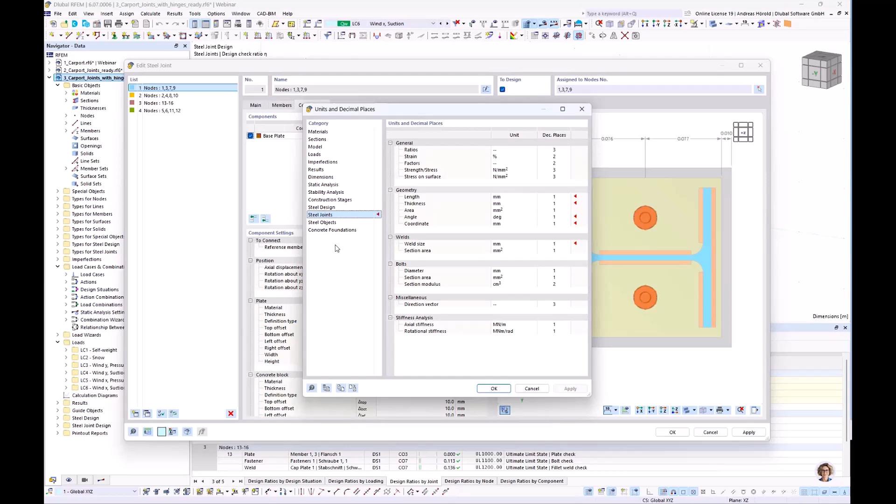Okay, so we can also display the values not in meters but in millimeters. Left at the bottom we can change the units, so for the dimensions from meter to millimeters. Okay, so that looks quite good. I apply that and print it in the printout report.

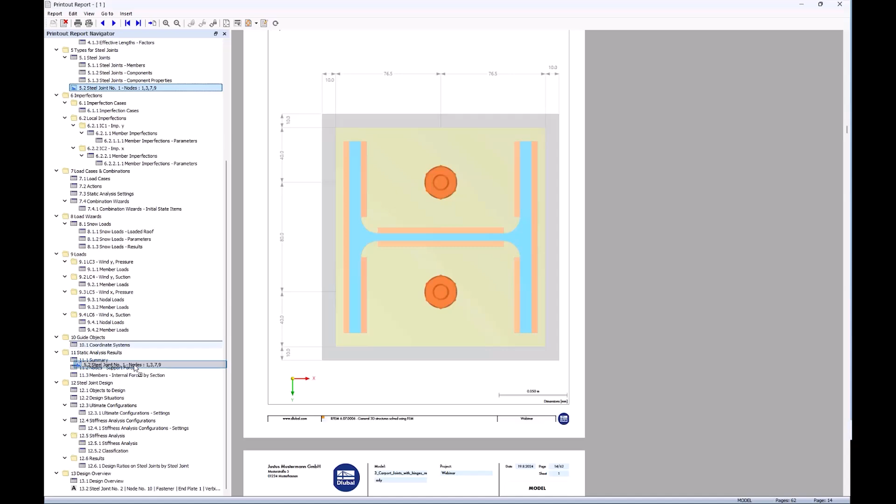So the printout report, okay, then maybe window filling, the rest of the settings are okay. I press OK because the printout report is already open. I move it to that screen again. You can see under types for steel joints, the graphic. I move it also to the end of the printout report.

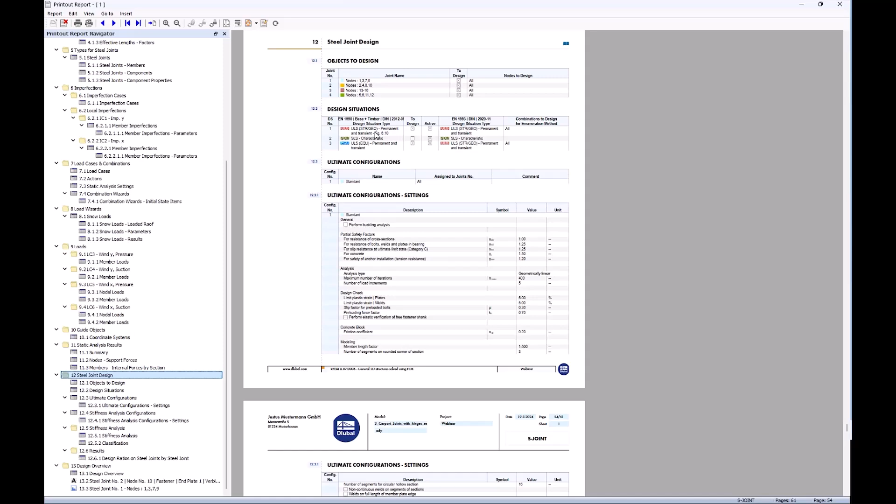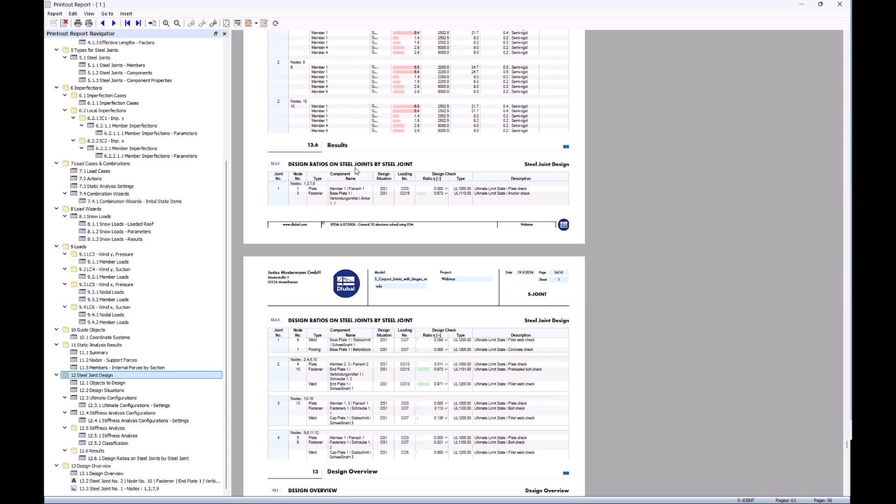Now let me check the steel joint design settings, the objects to design, situations, the settings, classification, stiffness analysis. Here the design ratios on steel joint by joint. And at the end, we have the details of the check and the graphic.

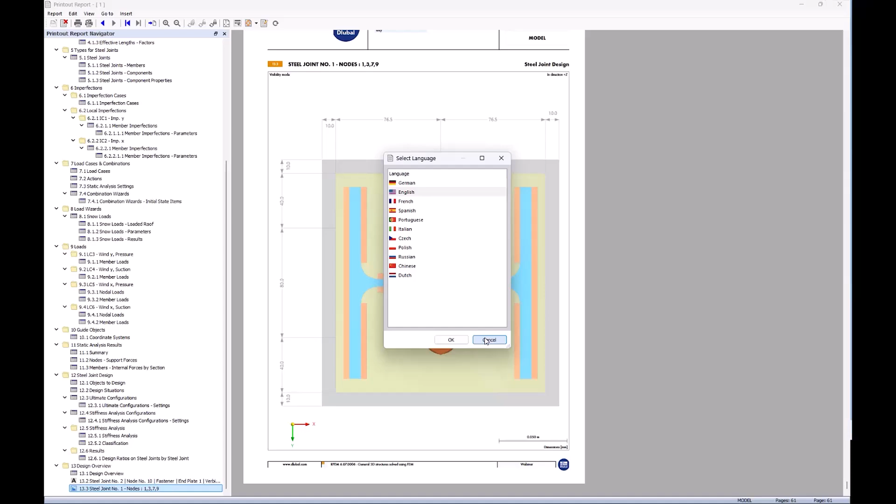Maybe some general features: you can print the printout report in a PDF or export it to an HTML file. You can translate the printout report, or it would be translated automatically into 10 languages. Okay, that should be all for the documentation.